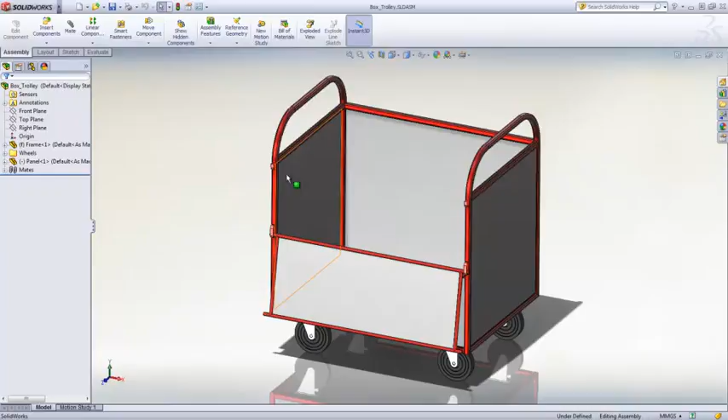There are many scenarios where creating a design as a multi-body part makes more sense than creating an assembly. A welded frame with sheet metal panel, such as this box trolley, is one of them. This is pretty typical of a welded design, with structural members for the main structure, gussets, and sheet metal panel on the side and the bottom.

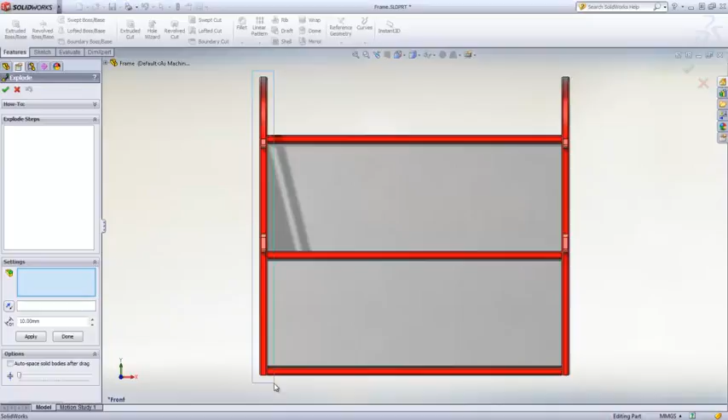SOLIDWORKS 2012 now makes it even easier to detail your multi-body designs ready for manufacturing. Exploded views can now be created to detail the relationship between components, how they should be welded together, and in what order. The process is almost identical to creating an exploded assembly.

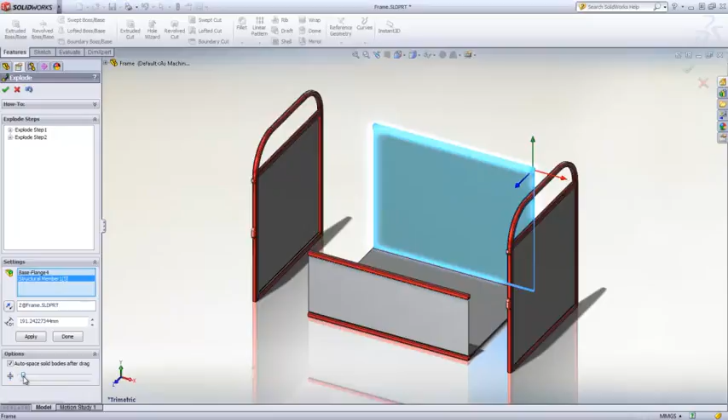All you need to do is to select the bodies to be moved. You can, of course, select multiple bodies for each step. The triad makes it easy to define the explode distance and direction and simply drag the bodies on screen. As in assemblies, you can create one or more explode steps, evenly spaced exploded stacks of bodies, or edit previous steps to include a new body.

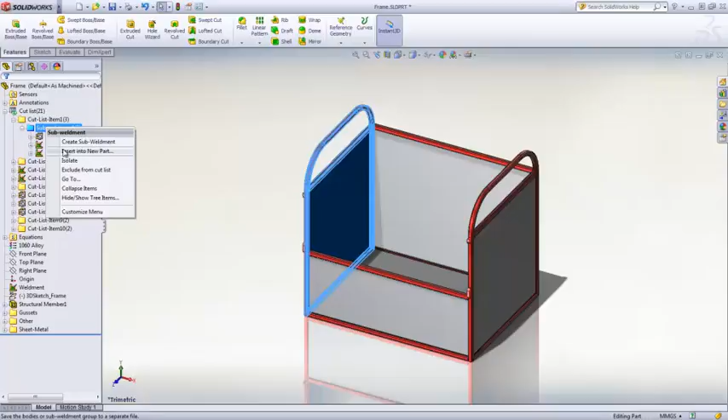If you prefer to manufacture your design as a series of sub-weldments, SOLIDWORKS 2012 has some significant enhancements here too. Just like with any other body, a sub-weldment can be inserted into a new part to make it easier to detail or to use it as a starting point for a new design.

The cut list properties defined in the original design are now transferred from the sub-weldment into the derived part and remain associative as long as the parts are linked together. This is clearly indicated in the cut list properties dialog box to avoid any confusion.

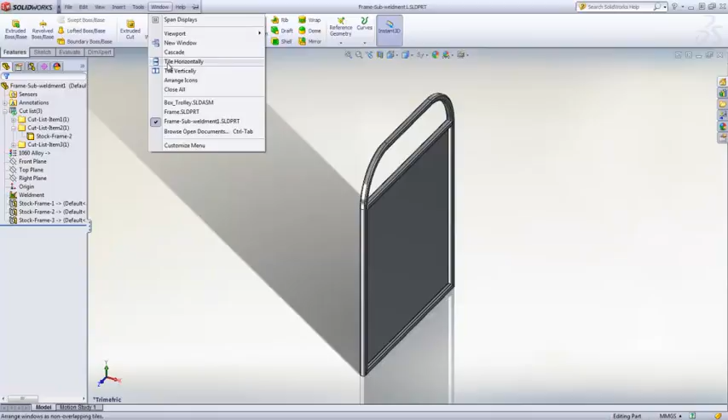Any new property created, edited, or deleted in the parent part will be reflected in the derived part. This applies to both sheet metal bodies and weldment bodies, so you can detail your sub-weldments and be confident that the information in the cut list is accurate and up to date.

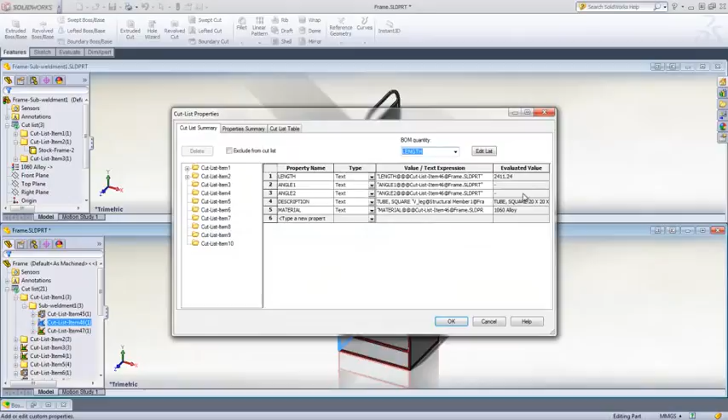After the design change, we can see the cut list has updated automatically. Switching over to the derived part, we see that not only is the geometry updated, but also the properties are up to date as well.

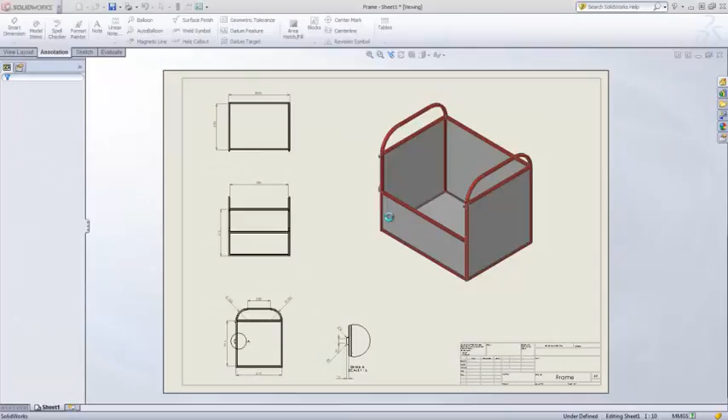Finally, exploded views for multi-body parts are also supported in drawings. Just like an assembly, exploded views can be dragged onto the sheet from the view palette, or simply toggled with the Explode View switch in the Property Manager or right mouse button menu.

SOLIDWORKS 2012 enables you to create and detail multi-body parts with as much speed and flexibility as assemblies, but with all the added benefits of multi-body modeling.